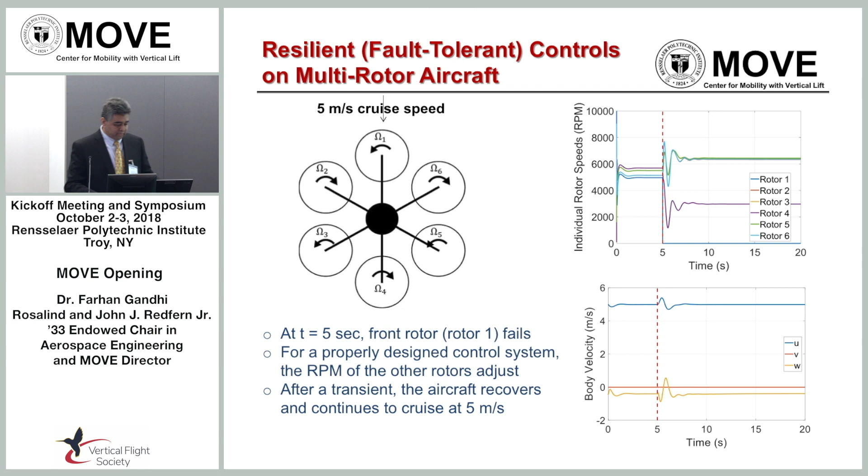So this is what happens. You had a little bit of a failure, one rotor failed, and then the aircraft recovered. It did not fall out of the sky. Big helicopters auto-rotate, but these small multi-rotors, because of the degree of redundancy that they have, and if the control system is designed right, there are other methods of recovery from failure.

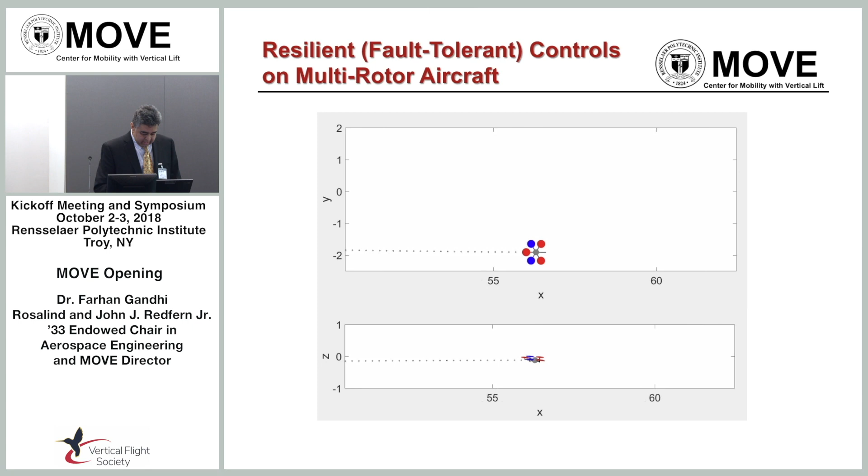Here's a second example that we work on. Big helicopters, single rotor, the kind of interactions you have are basically main rotor and tail rotor, main rotor and probably the stabilator. When you have a quadcopter, a hexacopter, an octocopter, many rotors working in close proximity, it is a mess. And if you look at this case here, this is a quadcopter flying in what we call the cross configuration.

So you have 2 rotors in the front, 2 rotors at the back, and the aircraft is flying upwards. This is a top view, so the wind is coming from here. The front rotors do okay. It turns out that the rear rotors start to lose a lot of lift. So you see these areas of dark blue? That's no good. That's about 20% loss of lift for the same power that you're putting into the rotor.

Now, NASA has seen this too, but we've taken the next step. We've asked, why does this happen? And if you take a single rotor over here, and this is where the location of the second rotor would be, but it's not there. And if you simply cut planes over here and you look at the wake of this front rotor, what you see is a region of very strong downwash over here. And that downwash starts to become weaker as you go further back. So this region of downwash over here, which is very strong at the front of the rotor, is causing the loss in lift. So this is very important to understand.

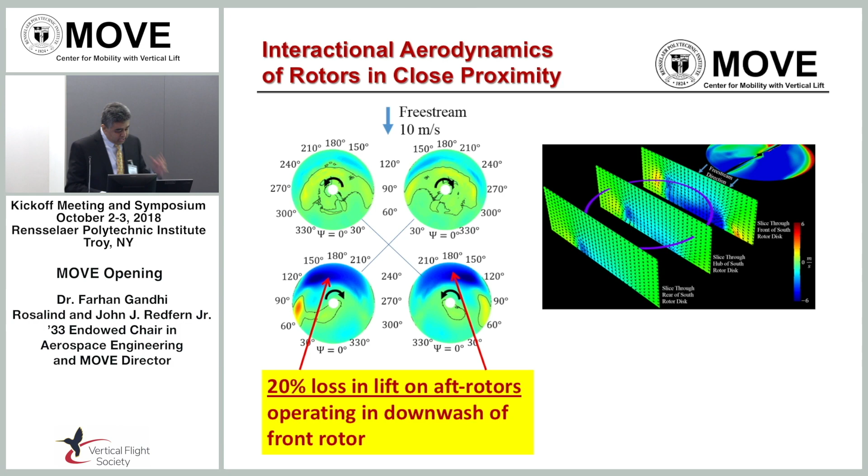And furthermore, if you reorient this aircraft, so it's not flying in a cross configuration, but what we call the plus configuration, one rotor in the front, one at the back, and two on the sides. Now it's flying forward. This rotor is in the downwash of this front rotor, but it's far away. And these two rotors on the sides are in the upwash of this front rotor. So now, instead of a 20% loss, what you get is a 6 to 8% improvement in lift over what would have happened if this rotor was not in proximity. So how you situate your rotors matters.

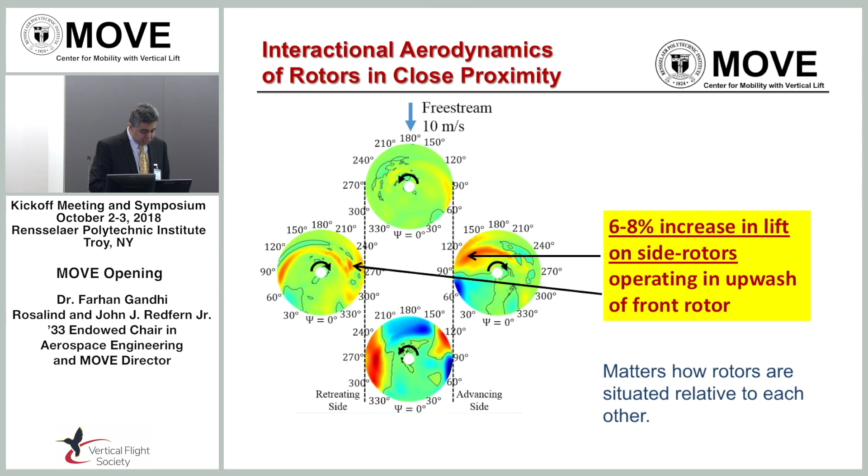And in multi-rotor aircraft like eVTOL, this is a very important question that the community faces today. Here is a third example.

One of the most beautiful things about these electric VTOL aircraft is their simplicity. There is no pitch control, no collective pitch control, no cyclic pitch control. All you have is variable speed. You put more power to the motor and it spins up faster and it generates more thrust. And that's your control mechanism. It is so simple that this is why people have been building it out in their garage.

The issue is it works very well for a 1 pound aircraft or a 5 pound aircraft. But when you think about air taxis with 6 foot, 8 foot, 9 foot, 10 foot rotors, now variable RPM control has a problem. Because you can put more power into the motor, but there is something called the inertia of the rotor. So you put more power, but the rotor does not spin up that fast. And if the rotor does not spin up that fast, the thrust is not generated that quickly, which means there are delays. The aircraft becomes more sluggish, it's not as maneuverable. So you're no longer driving a Ferrari, you're driving basically an 18-wheeler.

So here is an example. This is time on the x-axis. This is the heave rate. So you're trying to get into climb, right? You're trying to get to commanded rate. And if the rotor is small, this is in blue, you have the 1 foot diameter rotor, it gets to where it needs to be very quickly. But as the rotors become larger and larger, that process becomes slower, and the handling qualities of the aircraft go down. So at MOVE, we are posing these questions, and we are finding the solutions.

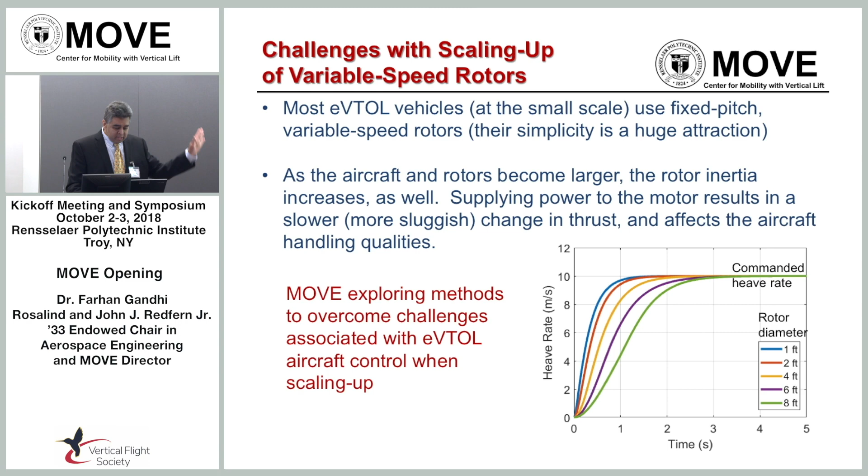So a lot of this was on eVTOL, but we also work on the big aircraft, the Defiant type aircraft that the Army is interested in as part of the JMR program. So if you look at these aircraft that want to fly at 230, 240 knots, large parts of the disc are basically in what is called reverse flow. So in reverse flow, the wind basically goes from the trailing edge of the airfoil to the rounded leading edge. Normally, in normal flow, the air would go from the rounded leading edge to the trailing edge.

This reverse flow condition is a no-good condition. You get negative lift, a lot of drag, a lot of pitching moments, and a lot of vibration. So what do you do? What we at MOVE have seen through CFD and experiment is that if you reflex camber this airfoil, the separation bubble on the lower surface becomes much weaker, and the ram pressure on the upper surface becomes much weaker. Here you have the drag coefficient versus angle of attack - this blue line is the baseline airfoil, and this is the reflex camber design. Your drag can drop by about 40 to 50%. So these are the kinds of problems we are trying to address at MOVE.

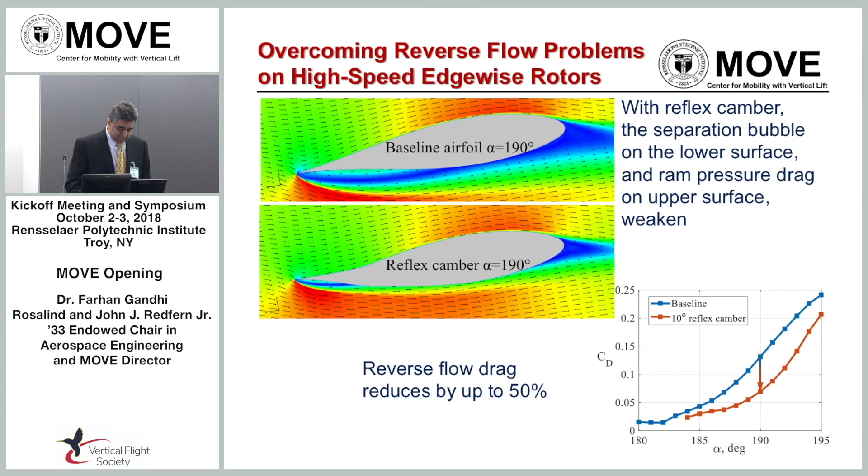But as President Jackson said, we can't do much by ourselves, so we are very grateful to our faculty team. We have a team of 10 faculty at MOVE representing a very wide range of disciplines, and we have partners at different academic institutions such as the University of Southern California, University of Portland. We have Professor Christina Ivler, and at the University of Maryland, the Alfred Gessow Rotorcraft Center, represented here by Professor Chopra, who is himself a Klemin Award winner.

And to RPI, starting from our department chair in mechanical engineering, Dr. Suvranu De, and our Dean of Engineering, all the way up to Dr. Jackson and her entire cabinet. We've had a lot of support from everyone along the way, and I really thank you all for the support that you've provided.

So Dr. Jackson mentioned our legacy. RPI's legacy in vertical lift is mind-blowing, and these are the three winners of the Klemin Award in the last 25 years that Dr. Jackson spoke about, our crown jewels. But that is hardly all - there is much, much more.